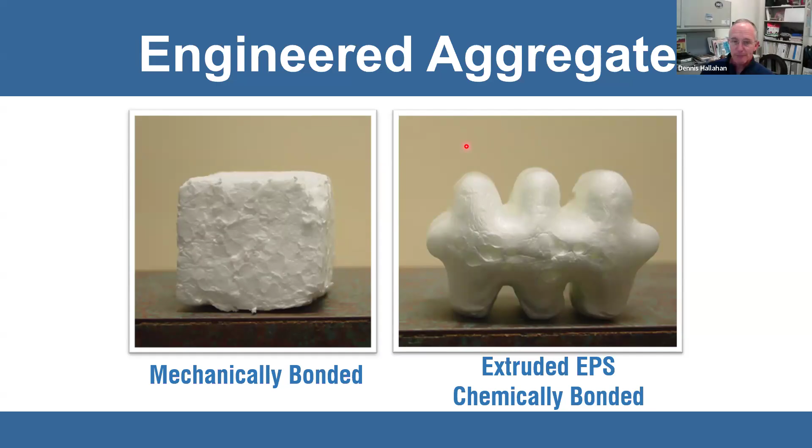A lot of people say, hey, how does that product, that material perform in a wastewater environment? Well, it does very well. It's what we call inert. It's not affected by wastewater characteristics and that sort of thing. So there's an assessment on that.

And EasyFlow is IAPMO certified. What does that mean? Many states, you can imagine a company, a manufacturer such as Infiltrator, we have to get approvals in every state for every product. And many states rely on the UPC, Uniform Plumbing Code. So how do you get in the Uniform Plumbing Code? You get IAPMO certified and tested, then you can be accepted into UPC. So it's just another item for you to say, okay, this product is well known, accepted, and used.

And what you're looking at in this trench is what we call EZflow 1203H-Geo. This is what you're going to see in most installations for EasyFlow in Illinois. What does this mean, 1203H? Well, it's a 12-inch bundle, so it's a 12-inch diameter. It's three of them. H is horizontal, so 1, 2, 3.

The center bundle has the pipe for the wastewater to enter from the septic tank or distribution box. It then falls to the trench bottom and disperses throughout the whole trench, and that water level rises over time. Everything has a design life. Most septic systems average a 20-year design life. So over the course of 20 years, this system will be full with water.

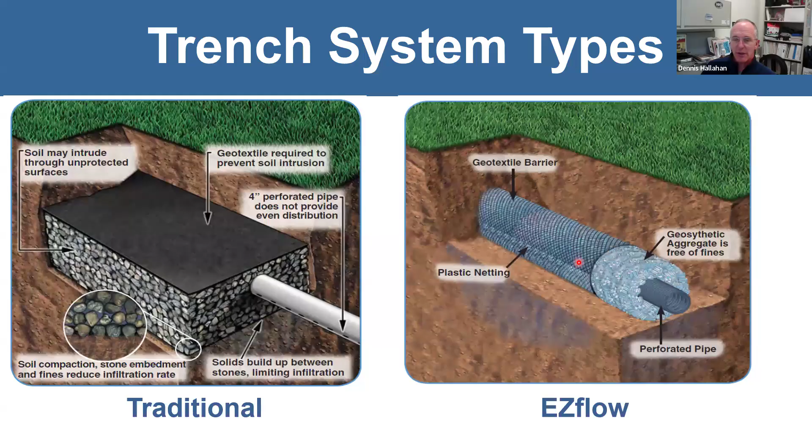Again, so this is what you may have seen or may have been typical if you're older in the business or been around a while, but it's really becoming less and less common. The chambers and/or EasyFlow are now becoming what we call conventional technology. You're going to see those more and more being installed out in the drain fields, and I'll show you some reasons why.

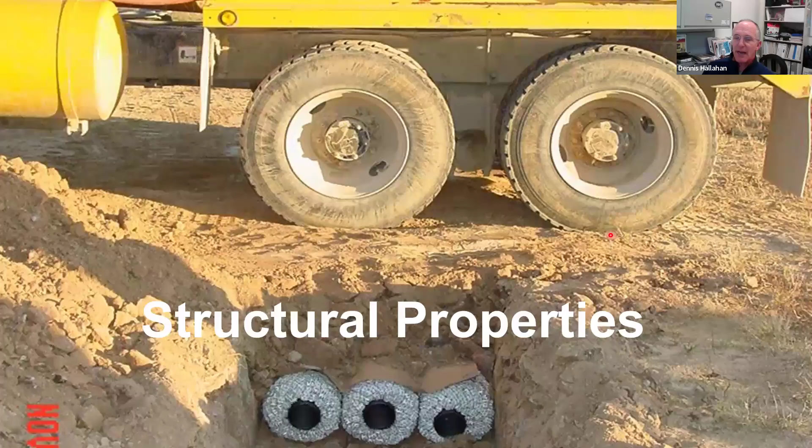Structurally, how does it perform? Very, very well. Once the product is installed in the trench or bed format and backfilled, you see a cover of 12 inches to meet what we call H10 loading. H10 loading is 16,000 pounds per axle. A car would be about 3,000 to 4,000 pounds total, spread among two axles. So you can see this has a large factor of safety.

I like to tell everyone, the worst day structurally your septic system is going to see is installation. The standard now is an H10 load rating with 12 inches of cover for the product. That's become a national standard that Infiltrator has implemented and many states have adopted. Think of a rubber tire backhoe, two axles, with a bucket on the front and excavator on the back, driving around. That represents a significant point load. So when they install it, backfill it, and grade it for that day, that's the worst it's going to see in most cases. That's what these systems are designed to withstand. During installation with 12 inches of cover, you can drive whatever you want over it, cover it up, get the grass to grow, and you're good to go.

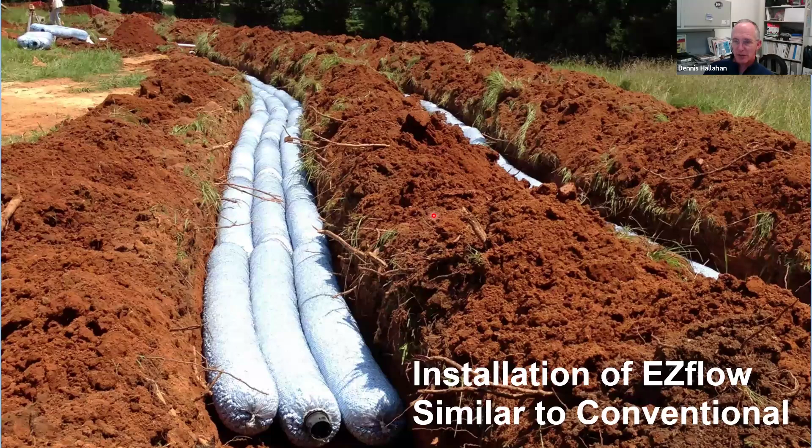Easy flow installation is very similar to conventional systems. Stake out your system, where it's going, excavate the trench down to the design trench bottom elevation.

Ideally, we like to keep them shallow. Shallower is better, but if there's better soils down deep, meaning more permeable soils, that's fine. But you'll find in most cases in Illinois higher groundwater tables, so typically they're installed pretty shallow.

You're going to excavate the trench and check the trench bottom to make sure it's level. The contractor will shoot the elevations, and it may step down the hill as you see here, but hand rake the bottom and then install the product. So very, very easy to inspect for systems.

For example, these bundles are 10-foot sections. So if you had 3 trenches that are 100 feet long, you just count up the number of bundles, and if you have 10 bundles, it's 100 feet. Easy to check the trench bottom too. You can just hit the tops of the easy flow with the level, the rod, and check that.

So very, very easy to install, no different than conventional systems. As I like to say, all these systems, whether it be stone and pipe, whether it be other products like easy flow or chambers, they're all soils-based systems. So the soils are what's important. We must protect the soils as much as possible.

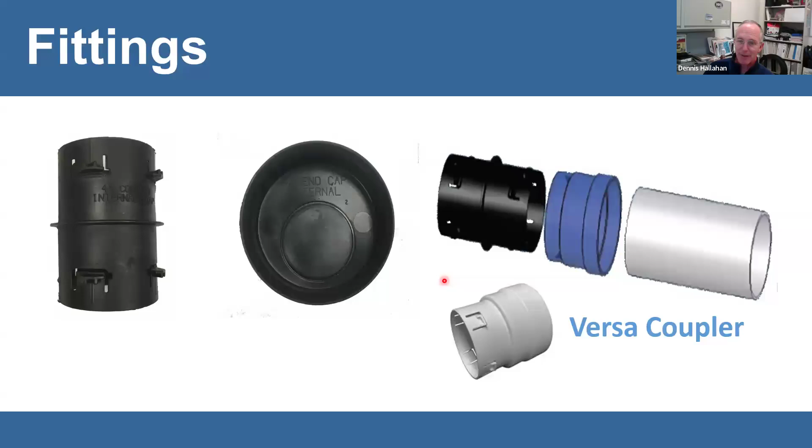Fittings. This is just a simple coupler that couples the two bundles together, that center bundle that has the pipe. They snap together easily. This is the end cap for the end of the line. And this is where you connect to the wastewater coming into the trench. So let's say this is the pipe coming from the septic tank or coming from the D box. There's a coupler there that goes from the PVC pipe to our coupler over here that then connects into the 4-inch pipe in the bundle. So very, very simple snapping these things together out in the field.

As Dr. Siegrist said from the Colorado School of Mines, who was one of the wastewater gurus in the past, he would say to me, Dennis, we're taking wastewater, which is water itself, which plants and roots love. But not only that, it has nitrogen and phosphorus, and we're placing it in the root zone. If you don't think roots are going to come in here, whether it's grass or trees or anything else, you're kidding yourself.

Where roots can be a major problem is in sanitary sewers, right? Where it actually plugs the pipe and the pipe is physically going to back up. So roots would be a problem in our systems from the house to the septic tank, right? That's what we call a sanitary sewer. It's just carrying solids and liquids getting into the septic tank. So if roots got into that piping, that would be an issue.

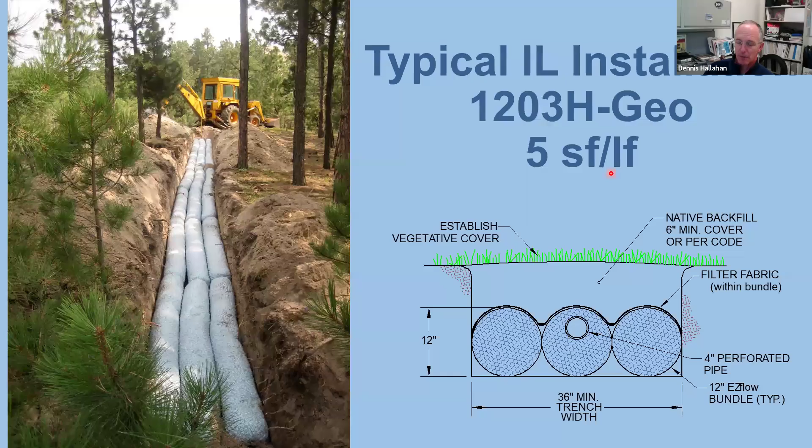Again, dry soils, you can see here.

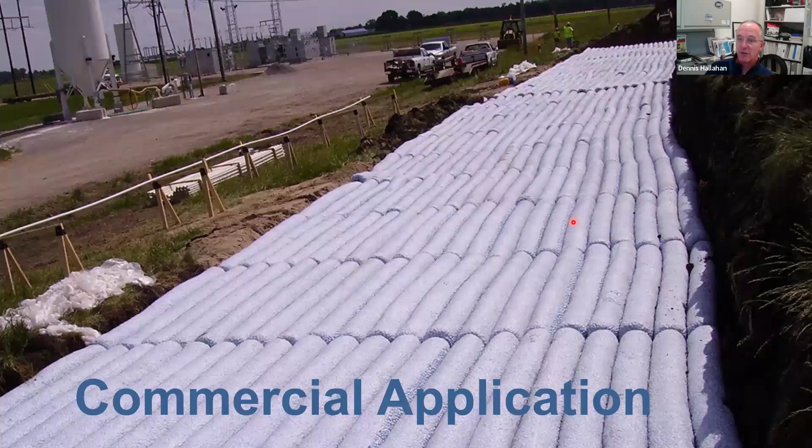We can also have commercial systems. They just get installed bigger, right? So this is a system for a mine in Illinois that went in. Very, very big system. You'll see beds here - that's one of the many beds going in on the side of this slope.

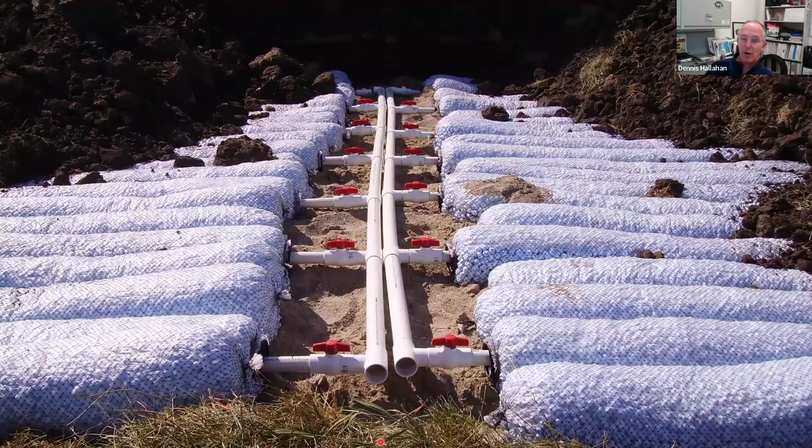And you can see we have different zones. A pressure pipe will hook up here and here, so this is a separate zone from this one. You can turn some zones on and some zones off if there's issues going on. It allows for management of the wastewater. So we can design them for single family or for commercial systems.

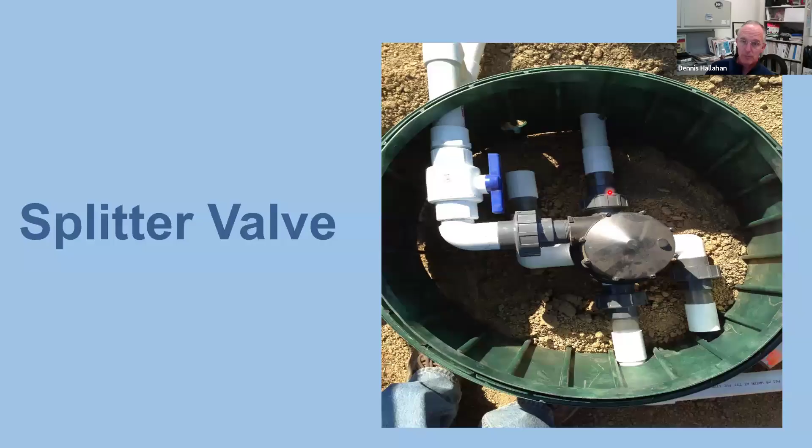This is a splitter valve. When we said go into different zones - let's say the pump comes on, it's going to go to zone 1. Next time the pump shuts off and comes on, it goes to zone 2, then zone 3 and zone 4. So how is that done?

It can be done a number of ways. One is solenoid valves - electrically actuated valves. Or you can have a splitter valve, a zone valve. These are called different things, but you can see the wastewater coming in from the pump and it goes to, let's say, zone 1, zone 2, zone 3, and zone 4.

So they have up to 6-way splitter valves. These are hydraulically actuated, no electricity required. Some engineers like this, some like to have electronically operated solenoid valves. So you may see some of each of these in the field.

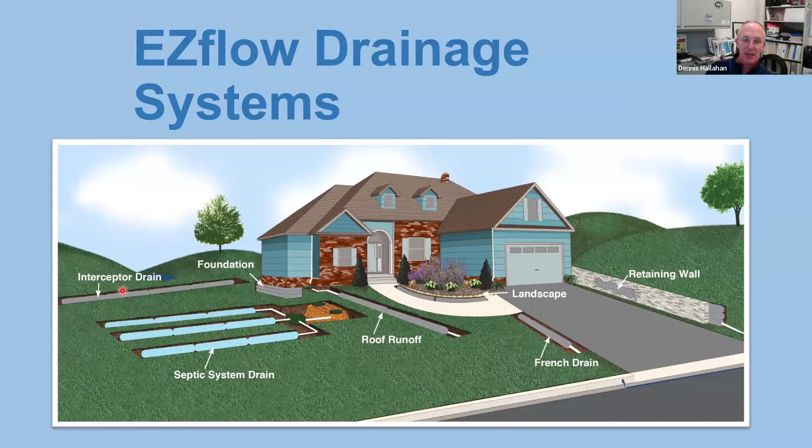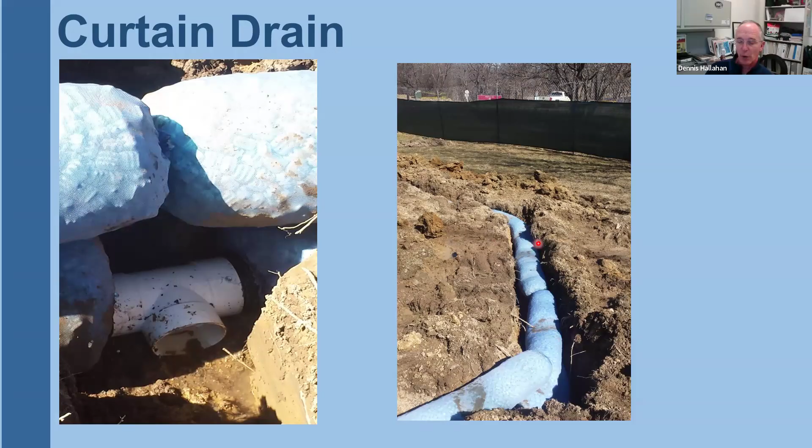In Illinois, we have approval to use EZflow for curtain drains, which are very common with on-site wastewater systems. If you have high groundwater, you can install the perimeter drain or curtain drains. Here you see one that's actually functioning, here's it being installed, and here it is during a heavy downpour - you can see water just pouring out of it. So it's very, very effective with EZflow to absorb that groundwater and move it out of the site.

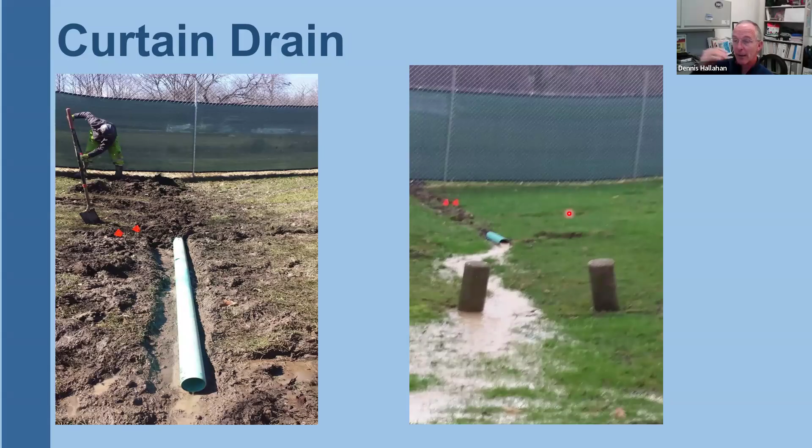Because ideally, we want our systems to be what? We want our systems to be high and dry to perform effectively.

Okay, now I'm going to move into what we call CTD. Some of you may be familiar with this. So CTD, what's that? That's combined treatment and dispersal. Right, so we're going to have a look at that.

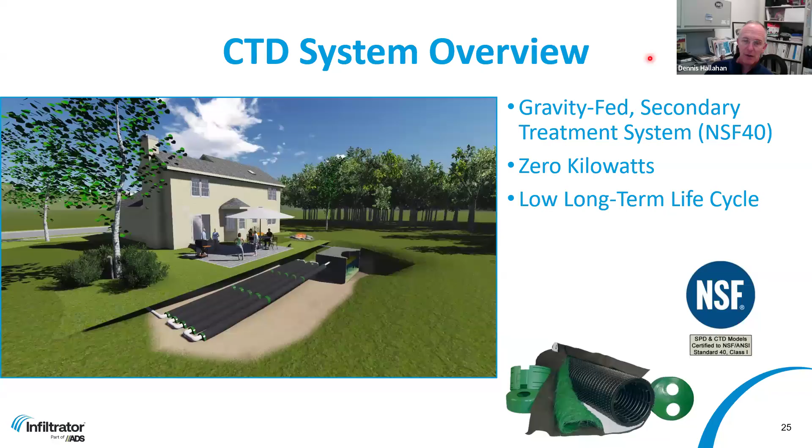Again, so it's combined treatment and dispersal. This is where, think of it as a modified proprietary sand filter. We can put it anywhere in the country now because it has a product, it has sand, and it goes on top of native soil. So let's go through the different layers here. The contractor will come and prep the native soil, install the system sand, a depth of 6 inches, put the product on top of it, and there's many products for this, what we call CTD systems. Backfill with sand around the system and put some cover over the top with soil, then have a vegetative cover. So those are the layers we have in a CTD system.

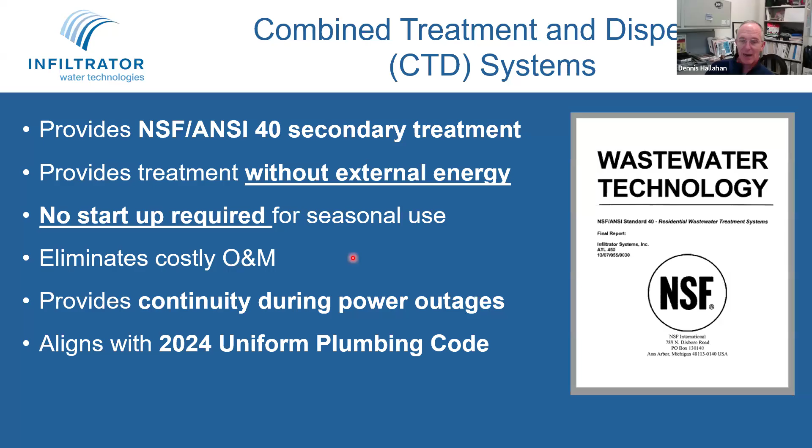Testing on this - this is actually approved as a treatment system. The CTD system is what we call NSF 40 certified. So this takes the place of a mechanical treatment system. If you're just looking for BOD and TSS treatment to NSF 40, this passive system will take care of that. It provides treatment without any external energy. It's all passive, no startup required for seasonal use. It eliminates costly O&M, provides continuity during power outages, and aligns with the UPC, the Uniform Plumbing Code.

If I were to ask everyone in the room, or a bunch of engineers, what do we need for wastewater treatment? What two factors do we need? We need oxygen and we need surface area, right - those two factors. So the soil provides that for us. I travel the country and tell people, look, the answer for wastewater treatment is right under our feet. Soil is a very, very effective treatment mechanism.

All we're doing is taking the effluent - think of it as organics. Organics is food, we're just feeding the bugs, the bugs being the microbes. Microbes are just sitting there waiting to be fed. We apply that wastewater to the soil, and the microbes just love it, they eat it and consume it. So it does a great job for us.

Now, the one thing NSF 40 does not address or treat by design is nitrogen. If you're looking for nitrogen treatment, then we may go back to a mechanical treatment system with recirculation and other types of things. The NSF 40 does not address nitrogen, so we're just looking at BOD and TSS for a higher level of treatment.

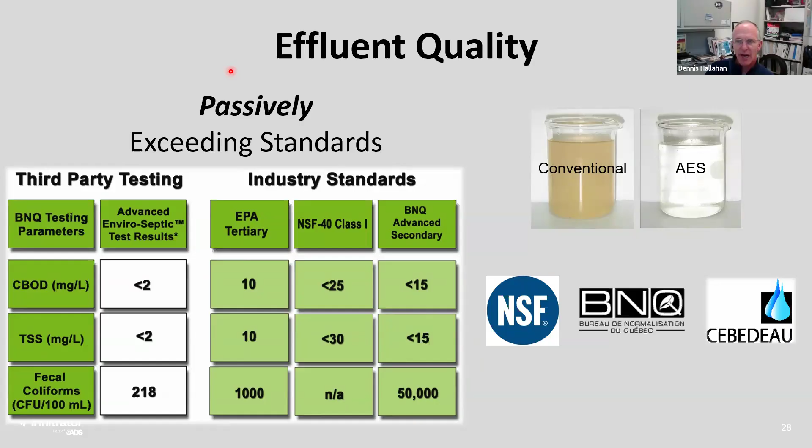So whether it be EZflow, whether it be a CTD system - again, many products there, other manufacturers, our stone and pipe system - all these systems are soil based. We still need to have a very, very thorough site evaluation. We need to know where that water table is, what the application rates of the soil are. So we need to get the soil scientist out there and do a very thorough site evaluation.

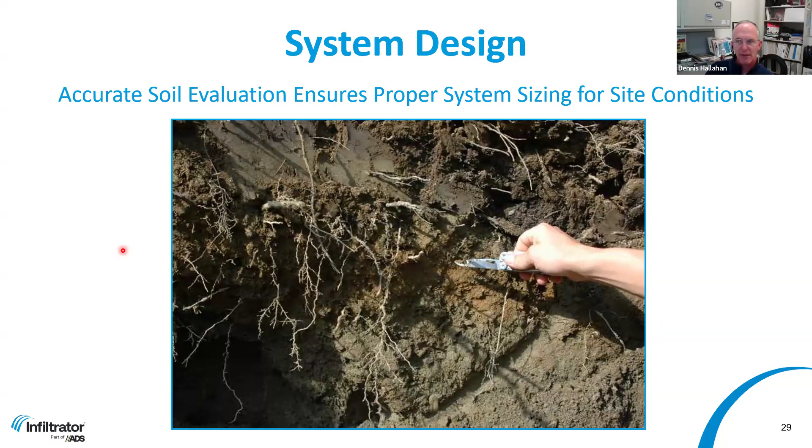The design guidelines for AES are very simple. We size it based on 70 linear feet of pipe per bedroom. And then there's spacing, and most states have a trench length maximum, most of them at 100 feet, so we put that as a limit, but other states allow longer lengths if you'd like. Just like we say the recommended minimum length is 30, but there are some cases where we need to be less than 30 because it's a repair.

And hey, Dennis, I got a backyard - it's a tight little backyard, I don't have 30 feet of width or length, I need to have a bunch of rows that are 20 feet long. Okay, fine, we're happy to do that. But ideally, somewhere between 30 and 100 is good. And then, of course, all the rows are installed level, but there's a tolerance as well - it doesn't need to be exactly level.

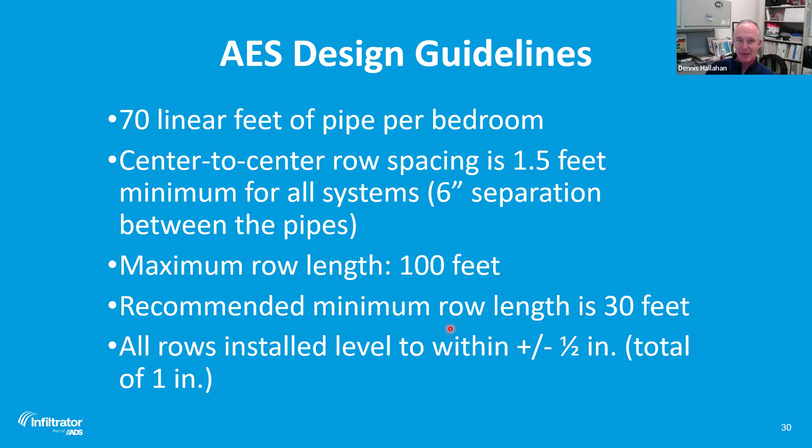Lots of system flexibility here as well. Just like EZflow, we can have curved systems to fit the site, to get around trees or get around a utility box or whatever's there out in the field.

The first interface is wastewater, so septic tank effluent, into the soil. That sizing is 70 feet per bedroom for residential strength. If we're talking commercial, get in touch with us because it's a higher strength effluent, so we may need more trenches, a lower loading rate, or advanced treatment in front of this. For today's application, let's just talk residential strength.

So this first interface again is household sanitary waste going through the pipe, coming out into the soil. Again, that's 70 feet per bedroom.

Then the wastewater travels down through the soil and gets treated. It hits this secondary boundary, which is between the system sand and the native soil interface. If I have a native soil that's very porous, like a granular soil, I don't need much interface here to make that go away. If it's clay, I have to expand my boundary because it's basically now clean water hitting the native soil. So a clay interface may have an application rate of 0.1 or 0.2 gallons per day per square foot, whereas the granular interface application rate may be 1 gallon per day per square foot.

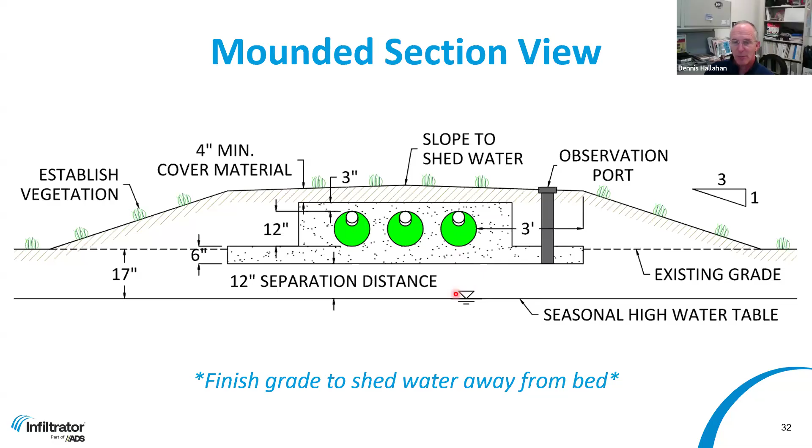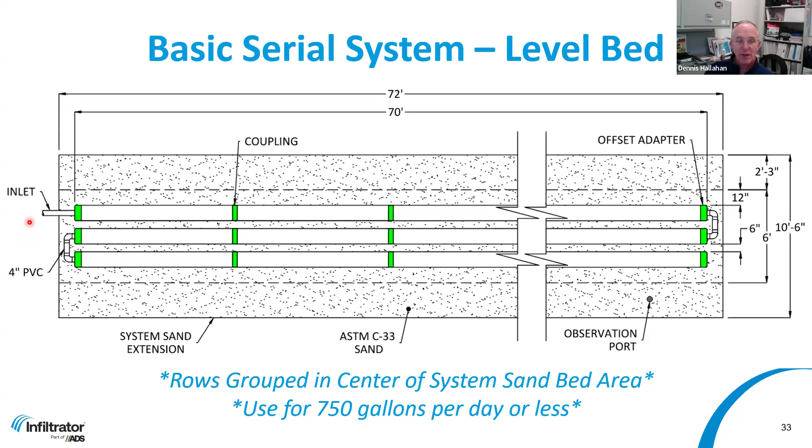Lots of ways to lay out a CTD system. This is a serial system, so it comes in maybe from the D-box or directly from the septic tank, travels down row one, comes back for row two, and comes back again for row three. This could also all be set up as parallel—come here with a T, or come here with a D-box and go to each row. It's very, very flexible with design.

Just to show the piping layout, you can see we're connecting into the ends, whether this be one big long pipe with a header pipe. This system happens to be serial distribution, which comes into this first pipe, again from the septic tank or distribution box. It would travel down the length, come here, go down, and come back, and so forth. So serial distribution works just fine—we have no problems with it, and we have a lot of history with it.

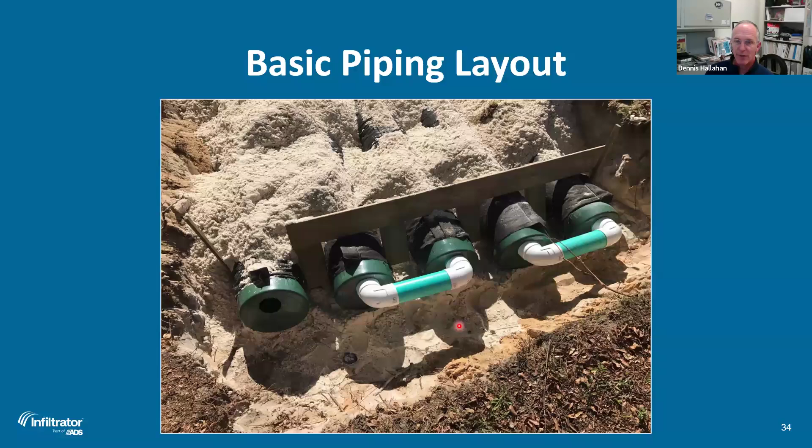Sloping with CTD has many benefits. If we were to lay out a chamber trench system, a pipe and stone system, or a bed system, we'd have to fill and then come down on a 3-to-1 slope—a lot of fill having to be brought in, a lot of site disturbance. With the CTD system, we just lay it out at grade. We step these down, just like stepping trenches down a hillside, so it can be very effective with a small footprint and fit the site very well.

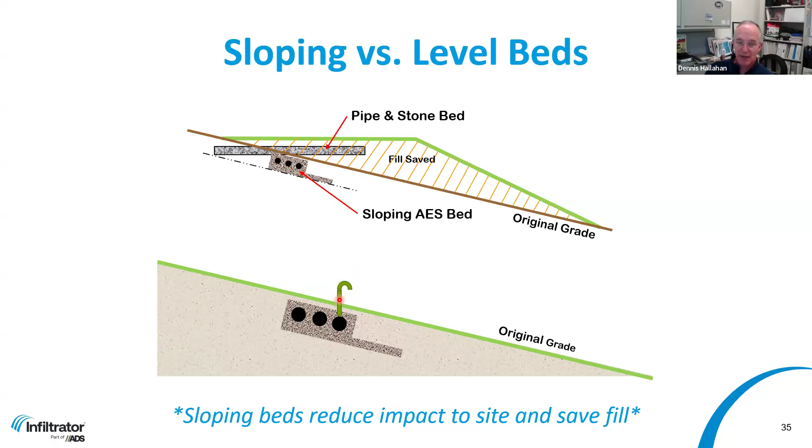Notice we show a vent here. AES systems, at least for our products, Infiltrator products in Illinois, do not require a vent. Yes, the designer or contractor can install one if he'd like to, but it's not required.

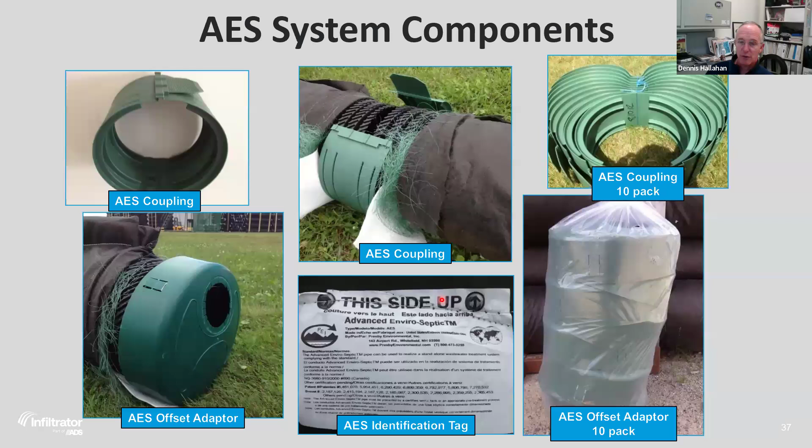There are components to the AES system, just like the EZflow system. We have couplers. The pipes come in 10-foot lengths, and they're coupled together. We actually have a new coupler that's a little bit simpler and easier and faster to use now, but this is our older one, and you'll still see these out in the field until those all get used up.

So very simple to attach the system together. Again, more layouts - what if we had multiple beds? Here we have a D-box coming in, going to bed 1, going to bed number 2 and 3, and so forth.

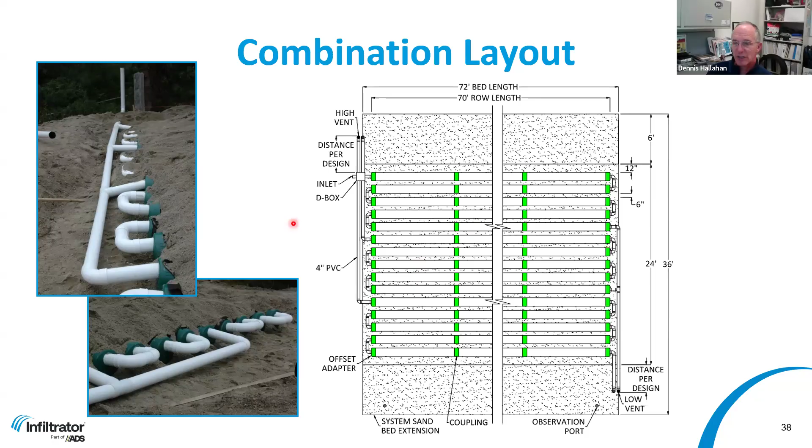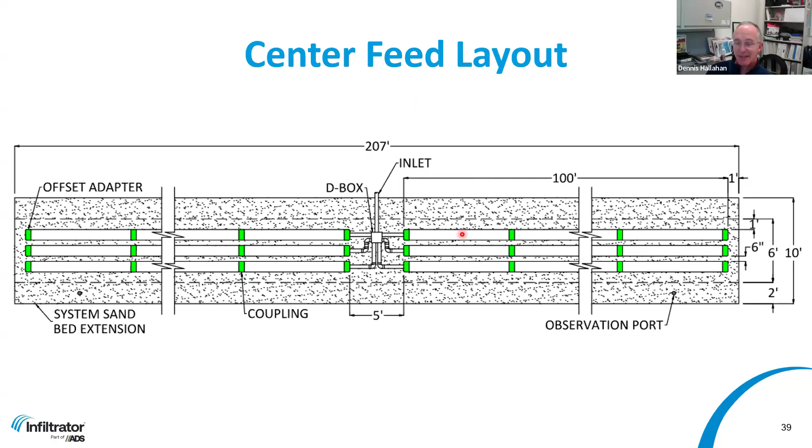You can imagine a large commercial system may need to look something like that. Here's a center feed - this is maybe a long, skinny lot. We can't be over 100 feet with any one trench, so let's come in the center, go 100 feet one direction, 100 feet in the other direction, and that happens to fit the site. So however you plumbed a system or designed a system for the layout, the AES system can accommodate that as well.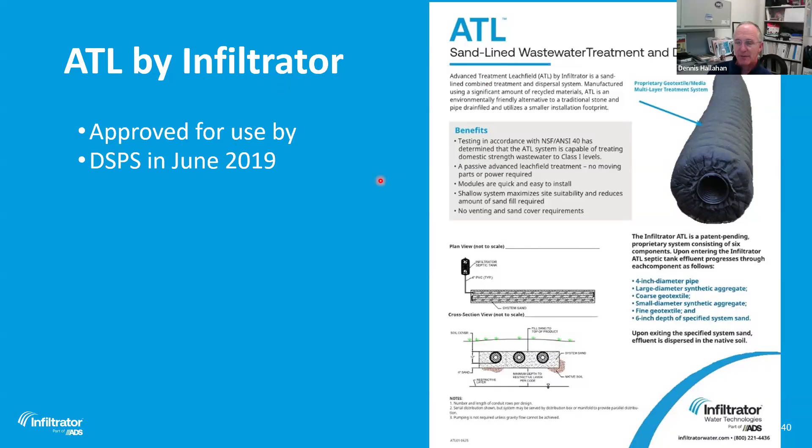Another CTD system you may see in Wisconsin is ATL, that's Advanced Treatment Leach Field. I just want to mention it in case you do see it, but that's also out there. AES, meaning Advanced Enviroseptic System, is definitely more common, but I just want to mention you may also see ATL. Very, very similar, very common type of system. It follows all the same design guidelines.

So installation, again, very simple. You're going to prep the site, assemble the system, install it, backfill, and then provide your site grading. So step number 1, what do you do? The contractor shows up, scrapes all the organics from the dispersal area off to the side. This is really important.

Where do we see most failures with this system? It's that native soil interface - maybe it's compacted, maybe it's smeared. So however you prepare, let's say, a mound system, you till it in place, you have the chisel plow, or however you do it in your area, please do the same. So you're looking to provide an interface that's not smeared, that's not restrictive.

And then mix in that system sand - sprinkle it, ladle it in, or push it in from the sides with the dozer pushing it in. Do not have the dump trucks drive over the system and dump on top of it, traveling over the system. Keep those dump trucks off. It's all about the soil.

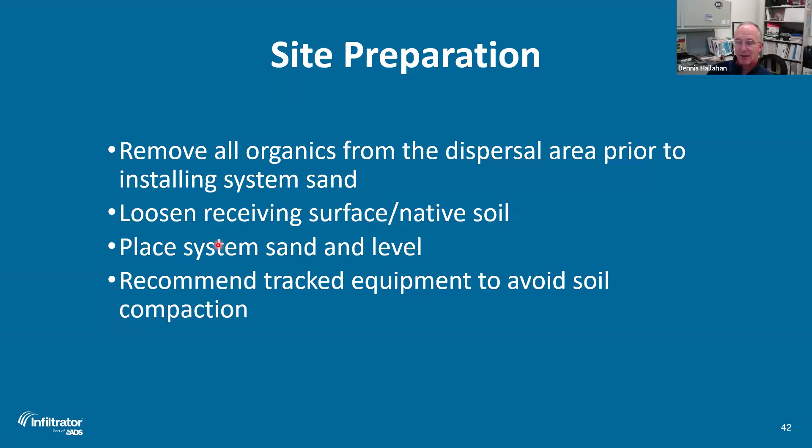So we're going to loosen the receiving soil, that native soil interface, prep it nicely, and then place the system sand and level it. By placing it, we're saying ladle it out there, scoop it and ladle it, or push it in from the side with tracked machinery. Again, we're looking for low impact to that soil interface, always looking to protect that native soil interface.

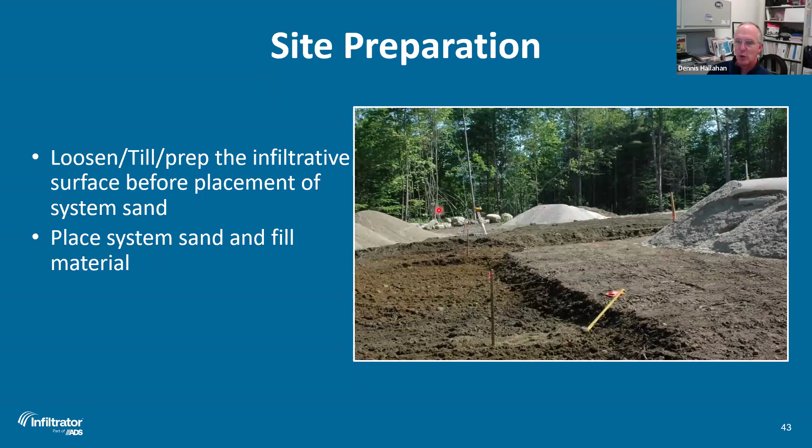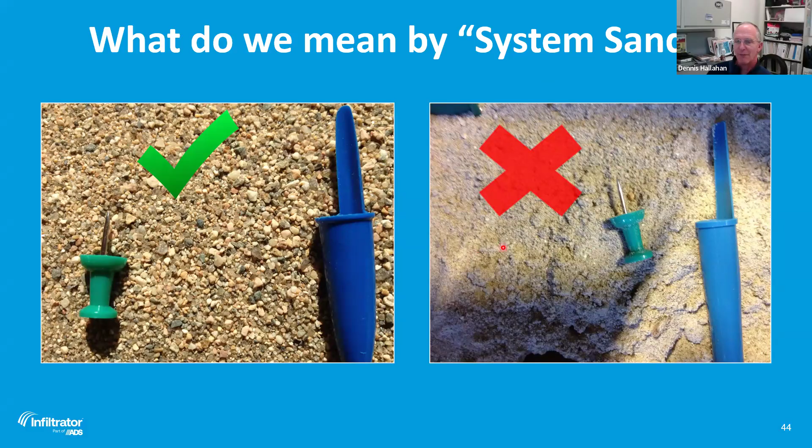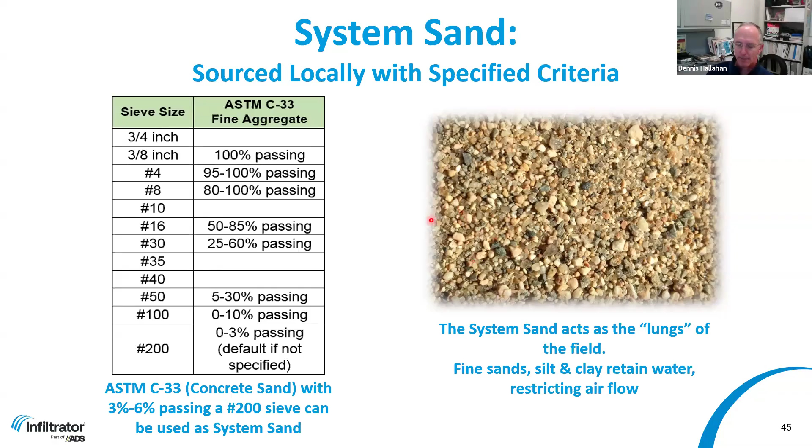There is a spec check available, so you can actually inspect the sand out in the field. We have instructions on that, we can train you on that. What's really, really great is if you do this once or twice out in the field and the contractor knows you're coming to check on it, you can guarantee that contractor is not going to cut corners with the sand. He's not going to use the cheap stuff and try and sneak it by you. If he knows you're coming out with this - I'm not saying you have to use it every time, just do it every once in a while - then you'll keep that contractor in line. So it's a great tool to have in your car with you.

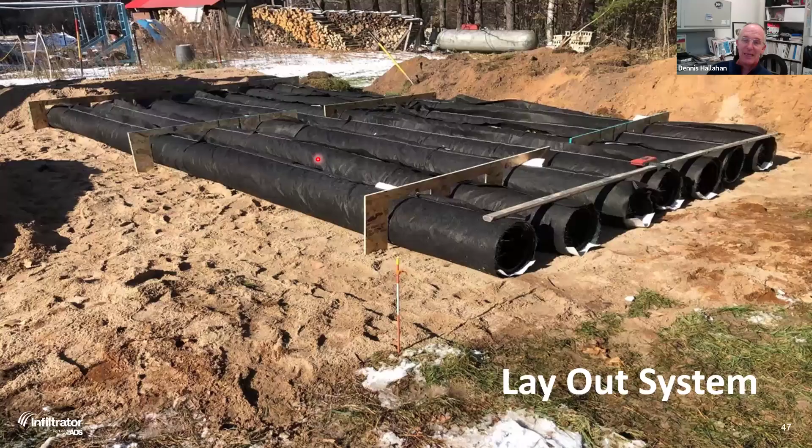Here you see a typical AES system going in. This happens to be a bed system. The end caps will go on. The contractors typically make some rough forms to hold it in place, so when they're ladling that backfill on top, the pipes don't move. There's a number of ways to do that, but those will get pulled out.

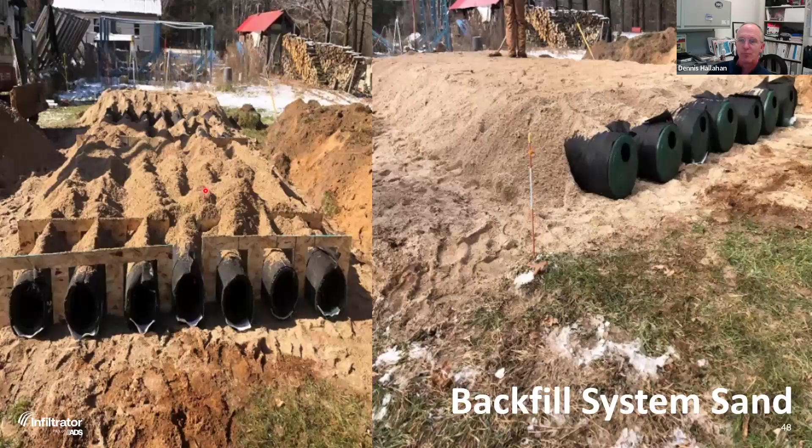What do we need for maintenance? Keep in mind, this is an NSF 40 treatment system, so there are other treatment systems. Hey, I have a blower - what do I do? How much sludge is in the tank? All those types of things.

Well, there's really not much maintenance to do with this CTD system. It's really whatever you needed to do for a conventional system, because there's a septic tank involved. So the septic tank and drain field - the drain field just happens to be, I'll call it, an optimized sand filter. So what do we need to do?

Just check to make sure all the components are buried, no rodents have come in and dug holes, and there's no moisture on top of the field with soggy soils. Maybe the system was abused or something and grease got out and it's starting to pond.

So you just gotta walk the drain field and check it. Pump the septic tank on an as-needed basis, and if there is a filter, pull the filter and clean it to maintain the filter. But that's really it - the same things you would do for a conventional system, you would do for the CTD system.

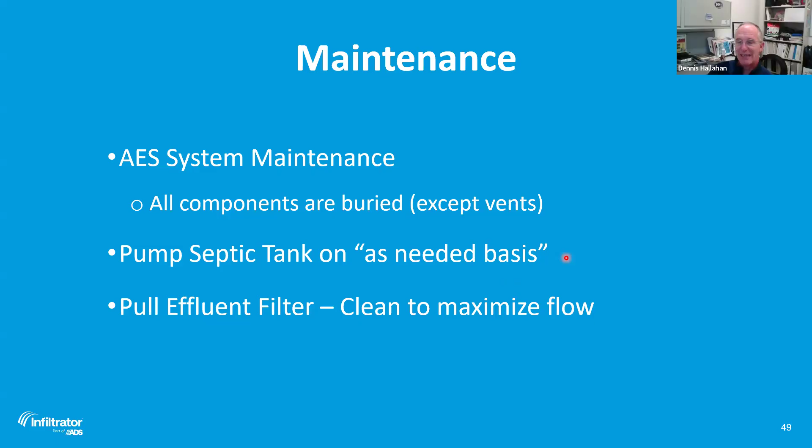So what does Infiltrator have for you to look at, to get training on? Certainly, you can always just call us and we'll take you through this. So don't feel like you have to memorize this, but go to our resource center. We have online certification training.

We have some Illinois-specific design manuals for both AES, CTD, and EZflow. So we have those design manuals available for you. Some states require we provide certification training, and then the contractor has to take the test. I'm not sure what Illinois requires - Curtis may know, and he'll let us know. But we have that available for you.

Yeah, Dennis, we do require AES online certification. That way the guys get put onto a list, so if a county and or the state calls to request a list of certified installers for this product, we have it available. So even though I might go out on a job site and train someone, I still make them take the test online just so that we can get the certification in house. Hey, that's great, Curtis. Thanks for jumping in.

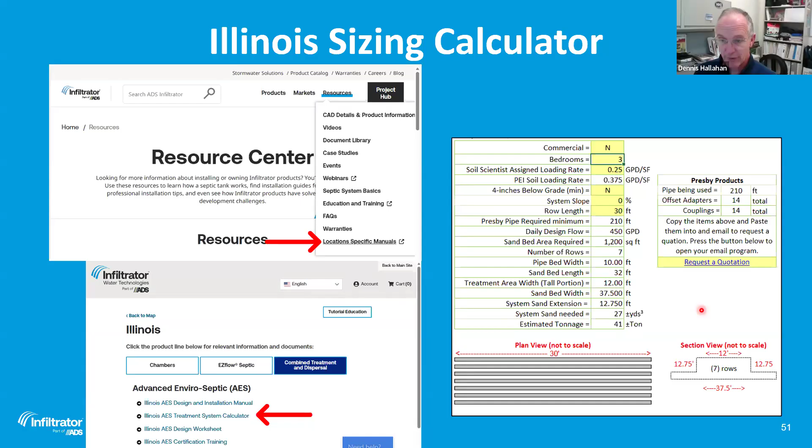Okay, the whole point of the presentation was what to use when - so EZflow versus CTD. When would I use one over the other? Well, they're pretty basic and simple if we break it down. EZflow is more a conventional system for conventional sites. If you have the space and the area, it's not a super tight site and you can fit it, it's probably your lower cost solution because you're not importing sand and that type of thing. So then you do use EZflow.

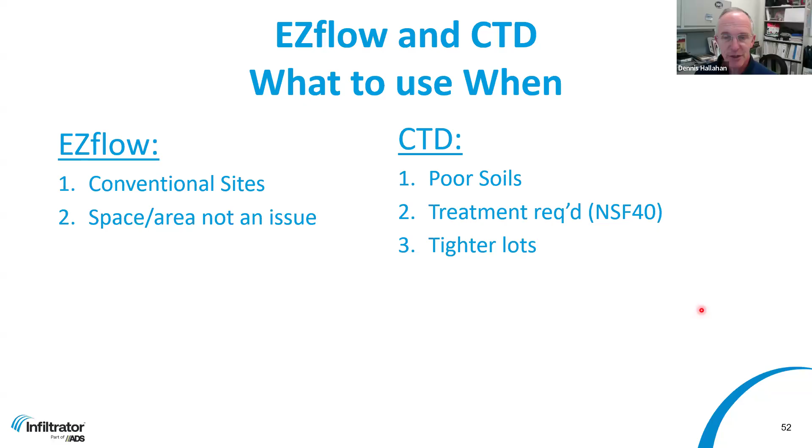When would I use CTD? Well, in poor soils areas, if treatment is required - again, to NSF 40 standards, not with nitrogen reduction - and tighter lots. So those are really the breakdown of when somebody would use it. Now, there are two other things added in here: there's both a designer preference and a contractor preference. Somebody may say, look, I just love CTD, and I'm a designer.

I'm going to specify it, or maybe the contractor loves it and he's all set up with his distributor, and he gets shipped truckloads right to his yard from the distributor. So they can do that. I just want to throw this in because sometimes designers or contractors have a preference for what they want to do.

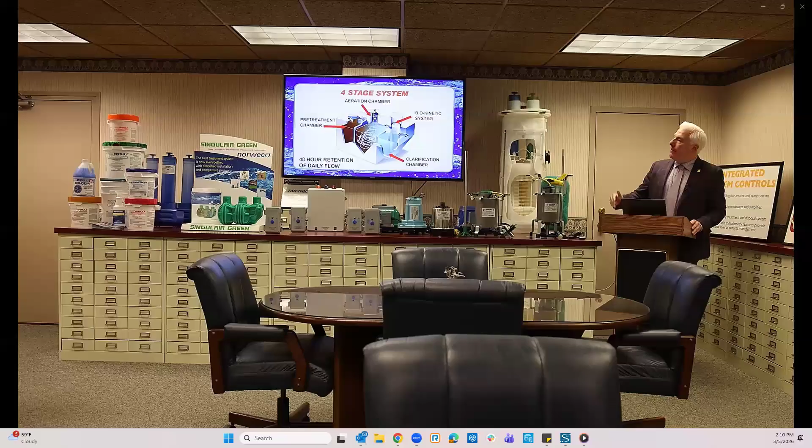So this is the smallest chamber in the Singulair technology. This is going to have a 6-hour retention time of the daily flow. But very importantly, this is going to be where final filtration takes place through the biokinetic system. We're going to talk more about that, but here is our demonstration cutout of the BK system that also functions as a flow equalization device.

I would pause here just to point out that there is 1,300 gallons total capacity, again, in the base model concrete or the Singulair Green, both of which are NSF certified to treat up to 600 gallon per day. But there's also over 250 gallons of freeboard area for when surges occur.

Now, we just got done with the Super Bowl, obviously prior to that, Christmas, New Year, other holidays, and that's where this is going to really help the homeowner because, again, life doesn't just happen routinely every day. There are surges into the system, and our biokinetic system really is unique in the industry in that it's going to hold back those surges that occur to ensure that only fully treated effluent is going to go out into the environment or to the disposal area, as opposed to partially treated or untreated effluent.

The final thing I want to say, I did not mention, the pre-treatment chamber has 18-hour retention of the daily flow. So you can see in 48 total hours, the Singulair process will take that raw domestic strength wastewater and treat it to extremely high levels. And don't take my word for it, although I hope you will.

If you look at our field data and our third-party certification tests, which I can provide to any of you upon request, you will see that the Singulair technology—you can count on it. Most importantly, the citizens of Illinois can count on it to treat all of their wastewater to a very high level.

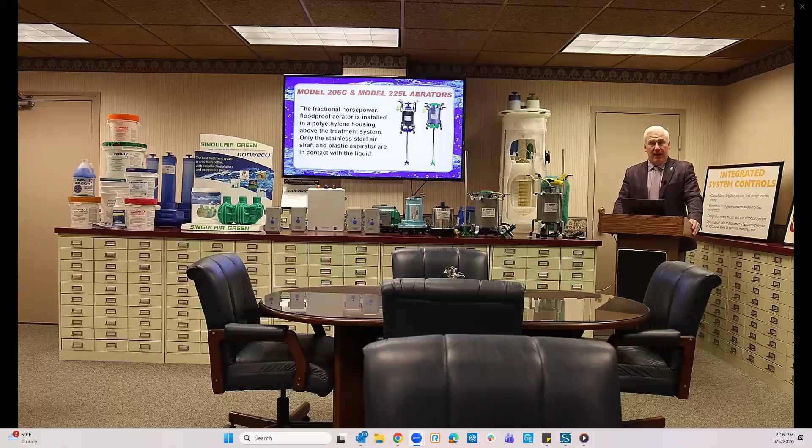These aerators are indistinguishable in terms of the motor bell and the spinning at 1,725 RPM, delivering 3 cubic feet of air, and also where they fall in aeration. The only difference is the bracket pattern, and a slight reduction of the length of the aspirator shaft for our 225L reduces the overall profile of a tank by 6 inches, which, in shallow lots or lots with other challenges, can make a huge difference in terms of inconvenience to the homeowner, but also the work that needs to be performed by one of the professional installers who work with our partners.

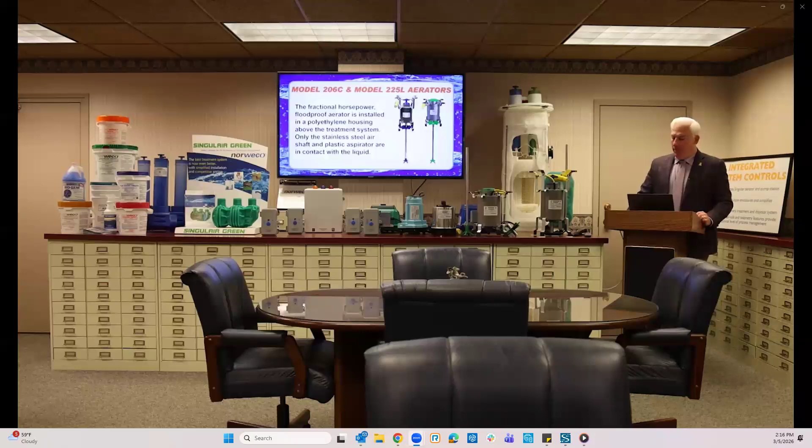The biostatic sludge return, I've mentioned this before, it's a very simple plastic duct, or ducts in the case of the larger capacity Singulair systems, but they do perform a very vital purpose. They're going to direct settled solids that come into clarification to the bottom of that sloped hopper. And they're going to be returned and resuspended in aeration, and by virtue of this, the wastewater will be fully treated.

That's very important for the homeowner, whether they're discharging off-lot through an NPDES permit, or on-lot to their disposal area. Because if you have partially treated or untreated effluent going into the disposal area that's on-lot, you will quickly get that filled up, and it will require remediation, including but not limited to potentially removal and replacement.

The biokinetic system, too, is very simple, and we keep that theory of simplicity because our technology works very well, and we want it to be easy to understand, easy to maintain, and we've accomplished that with Singulair. The bottom line is, as the treated wastewater is entering the clarifier, the biokinetic system works in concert with that biostatic sludge return.

And as the water then leaves the system, you're going to be assured, passing through this NSF certified filter, that most remaining solids are going to be removed from the effluent. And if disinfection is required, this is also an NSF standard 46 and 385 certified disinfection device.

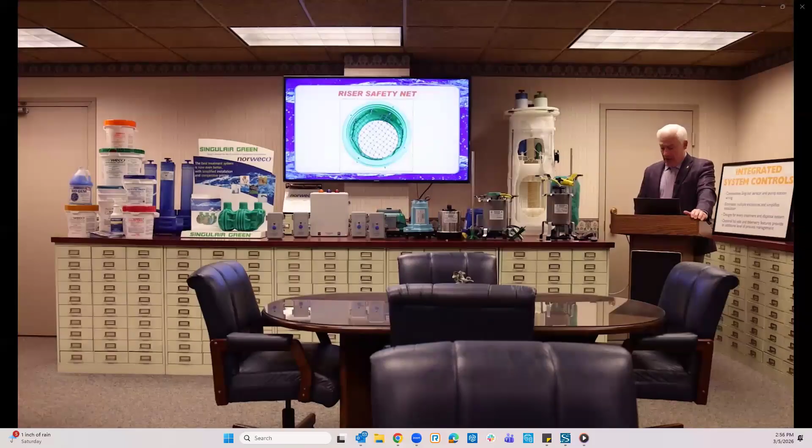From our employees all the way down, of course, to the people who are in the field, the children, animals, and things like that that are going to be near the system. We want to make sure there are no accidents, obviously, with any technology, and what we can control is ours, and we'll work very hard to offer this secondary safety device at cost to our partners, who in turn will offer it at a very, very low cost to the homeowner and other end users.

Very important both with green and concrete. Now with green, we have changed from we used to have 4 screws and grommets for our lids. About 4.5 years ago, we changed to threaded. When we did that, we included a vent cap over the lid that goes over aeration. The other 2 are sealed, so it's very easy to see which one goes over aeration.

And the same with concrete. Whether the partner is still using concrete risers and lids, it'll be obvious which one goes over aeration. Certainly if they're using plastic Tuf-Tite Polylok, which again is becoming more and more the rule rather than the exception, it's very obvious as well.

But it is imperative, and I cannot tell you how many times I've seen this get mixed up. I know people are busy. It's imperative that the vented access cover be placed over the aerator. And again, I won't get into that beyond the obvious, that it's very important.

And I always tell our service folks that come here for training at the request of our partners for service, to take one last look as you're walking away from a system. Make sure that vented access cover is over aeration and the sealed covers are over pre-treatment and the clarifier, respectively.

All right, so a few more things to go over. I want to quickly go over Singulair service.

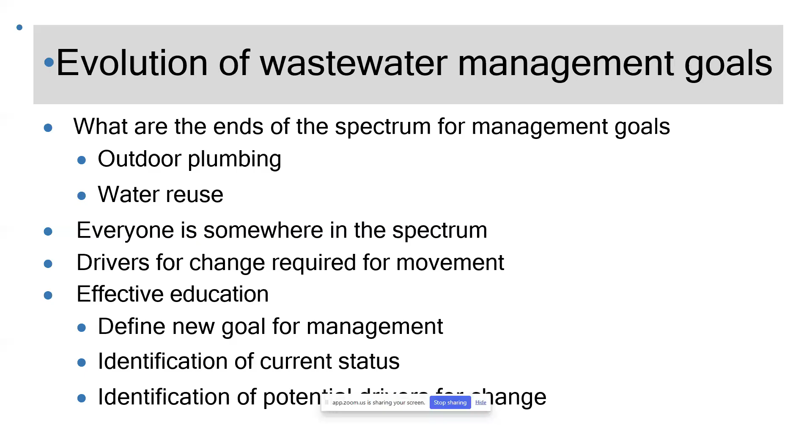As we move forward to have the most effective wastewater systems for communities and individuals, what do we need to know? What education do they need? What management do they need to know? They need to identify the current status and the identification of potential drivers for change.

So looking at outdoor plumbing, the pit privy—the goal is a designated place for waste, that's it. This is kind of your most basic form of wastewater management, and the way things were looked at for the longest time. There's no carrier needed to convey waste.

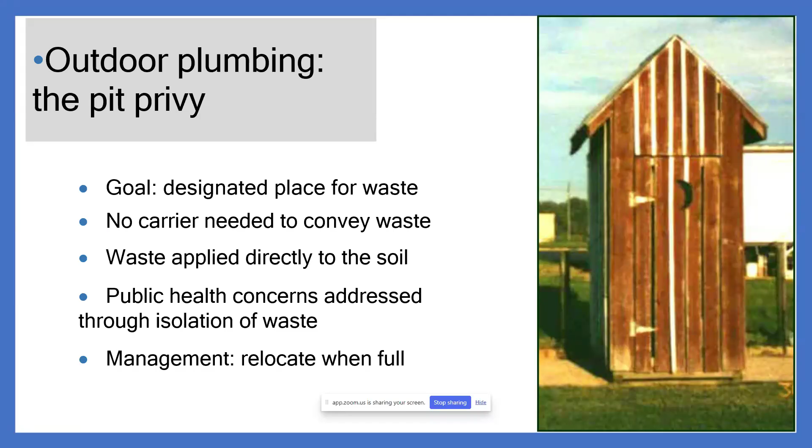You are just collecting the waste and not even treating it—you're applying it directly to the soil. The public health concerns are addressed through isolation of the waste, but we're not doing anything to treat that waste, so the public health concerns are very high. The idea is you relocate it when full. Very rarely do we see this, but we do see it in some communities every now and then—individual campgrounds can sometimes be one.

Indoor plumbing—the goal is to keep everything flushing, to keep everything working. The water carrier conveys the waste out of the facility. You do have a collection system, either on site or a bigger wastewater system. There's a hybrid called a cluster system now as well, which we'll go over later—basically a decentralized wastewater system where you're combining wastewater systems into a community. So instead of one individual having a septic or wastewater removal system on their property, we're combining that, but we're not doing a full wastewater treatment plant. Public health and pathogens—it does remove waste from the facility, and the management is just to keep that pipe flowing and keep everything going.

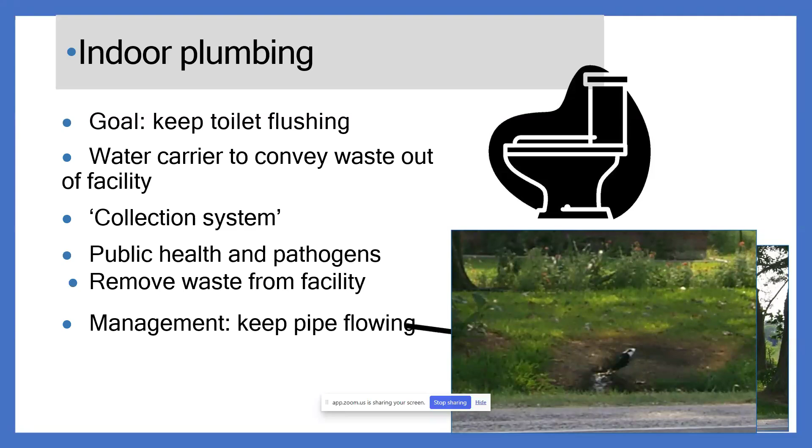Subsurface disposal—the goal is to limit human contact, again burying that waste. We're trying to keep that waste below ground, typically cesspools or deep injection of waste. We don't see a lot of this in the state of Illinois, but they are out there. Public health is disposing of pathogens, treatment is kind of hard, and the management is install, flush, and forget.

Solid capture and subsurface disposal—the goal is to limit human contact, to keep wastewater below ground. Our disposal options again are kind of limited. For public health, it's disposing of the pathogens, and the treatment is to add a septic tank to capture suspended solids. Management is install, flush, and forget. This is going to be the most common one we see among homeowners who are on septic, and it's really the basic form of wastewater systems, just on a bigger scale.

Septic tank and soil treatment area—it's an evolving goal. It's the disposal of effluent, goes away to dispersal, the contaminant treatment. Public health and environmental issues are addressed as long as they're maintained properly and doing all the proper maintenance, which can be overwhelming at times for homeowners. The management is disposal, often none at all, and the dispersal system management is critical for that dispersal. You want to make sure that aerobic soil is there.

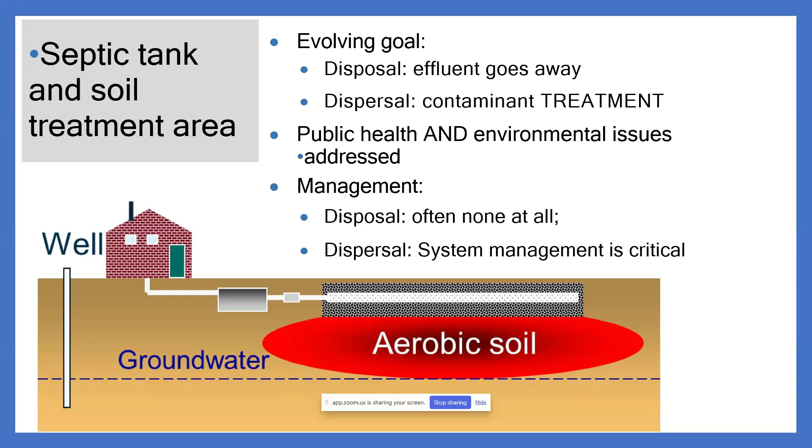This goes back to how bigger wastewater systems compare to smaller communities. While some do have wastewater systems, they are going to be much smaller than your larger community water system, so they take a little more work on occasion to upkeep, both financially and with maintenance.

Our goal for treatment and dispersal is now dispersal. Looking at the hydrologic cycle, we start to address both environmental concerns and public health concerns. Those kind of go hand in hand, but they are in separate categories. Environmental concerns: how can it affect the environment around us, how can it affect what's happening? And public health concerns: how do we make sure we are disposing of waste properly so that people are not sick, it's not affecting their clean drinking water, and nothing is going to happen to them.

Technology advances now allow for the removal of pathogens, solids, and nutrients. This technology is constantly evolving. I think we just saw a presentation on that as well, showing that the evolution of this is going quite quickly, so staying up on it is important.

But at the end of the day, the most important thing we can see is system maintenance. That's the most important thing homeowners and sewer systems can do: making sure that system is being properly maintained, that the wastewater is being properly treated, and disposal and dispersal is happening on a proper level. Once those things start to have an issue, that is when we can get into trouble.

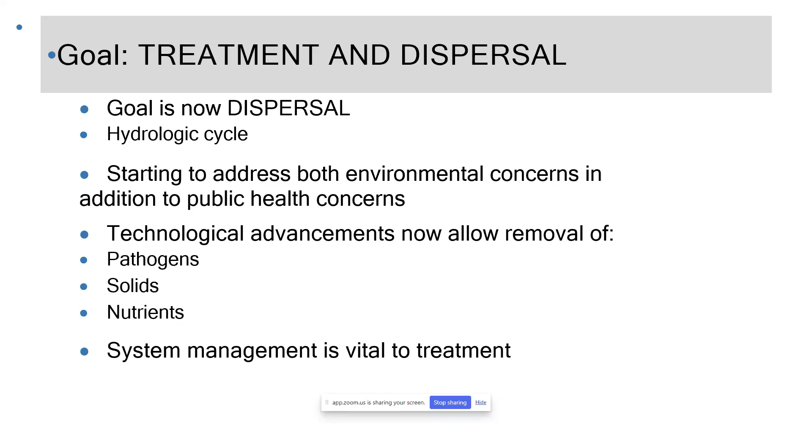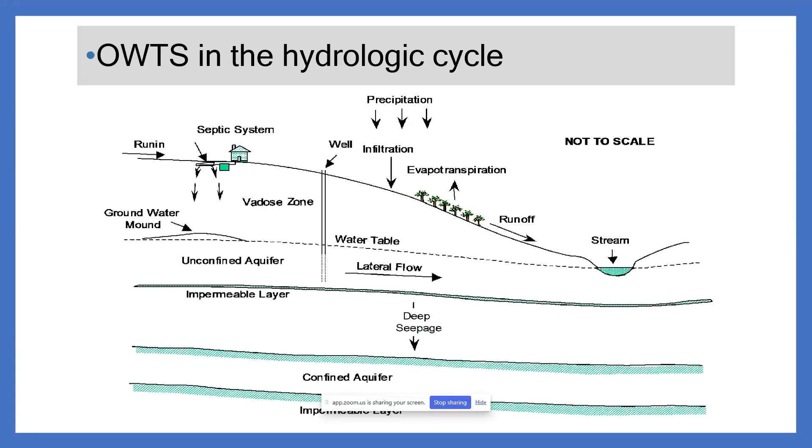So looking at this for on-site wastewater treatment systems in the hydrologic cycle, the real basics here show how it's spelled out, where the flow is, where the runoff is, making sure you're aware of this while looking at wastewater treatment systems, making sure your placement is right and everything is maintained, because at the end of the day they are part of a much bigger system within the water system, and they are key to public health and safety.

Now we're talking about water reuse, a more evolved idea - we're not just disposing of waste anymore, we are figuring out, can we use this water? How can we treat this water so it can become reusable? We can look at outdoor water reuse - can we treat the water to the point where it can be used for landscape, or for crops, or for aquifer injection? We want to make sure process monitoring is done so we have both the most effective and cleanest process, getting the maximum value out of our on-site wastewater treatment systems, and treating as much as possible to get those pathogens out.

We want to look at troubleshooting - it's critical. If there's any sort of failure in this, it can cause much bigger problems, leaking or things not being treated, especially when we're talking about water reuse, if we're actually using this water over and over again, as opposed to just treating it and getting rid of it. Once we go beyond that, troubleshooting and maintenance becomes the most important thing, and management is critical for protection of public health and environment. We want to make sure everything is working properly, so it's critical for everyone to be safe, especially when we're using water reuse.

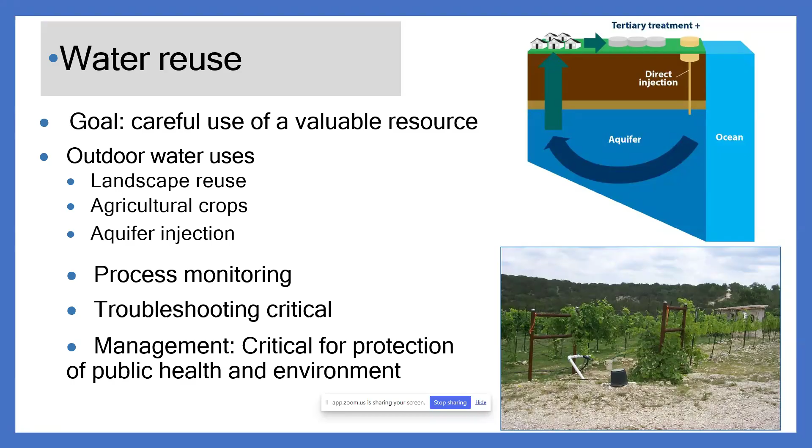Again, looking at water reuse, the goal is careful use of a valuable resource. We're getting to the point where we can no longer just dispose of this wastewater. We need to be able to reuse it, to make sure it can go back into the water system clean and properly, and that this water is being used to its maximum effect.

There are non-potable uses for it. Indoor water reuse, like urinal flushing in the bathroom. If it's treated properly enough, we can look at clothes washing as well, to do our laundry and make sure that it's clean and possible. We are reusing that water, but we are not consuming it.

Pathogen protection, detection through testing, is reactive criteria. It's too late. So we want to make sure we're doing everything ahead of time. If we start suspecting pathogens, it might be too late to go back and see what we were doing, especially with water reuse. So we want to get ahead of this.

Validate the treatment process, operational status, to limit risk. Again, we want to make sure that as we're going through this process, if we're working into water reuse, the treatment process is validated, that everything is working properly and perfectly before we really start going through it.

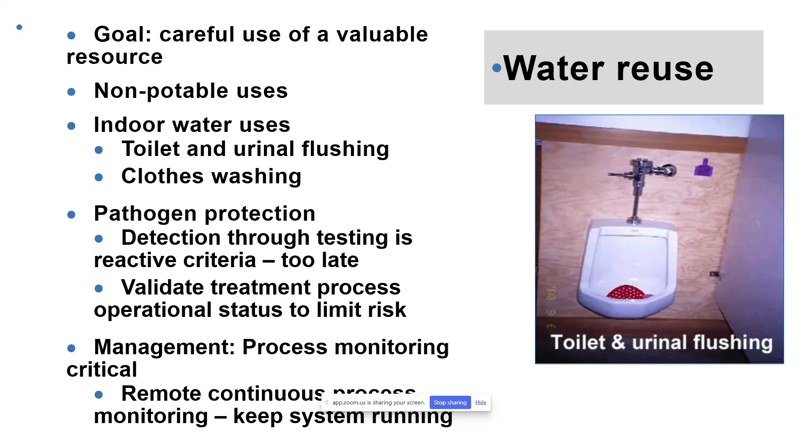So we want to make sure the system's functionality is right. Is it functional? Is it the right type of system for the goal we're trying to do? Do we need to look at septic, or a bigger idea like a private sewer or a much larger sewer system? Or do we need to think about one of those cluster decentralized systems? If you have a rural area that's growing, have we outgrown the basic septic? And if so, what needs to happen so the residents of that area are effectively getting everything they can for their waste disposal?

We want to make sure operations are up to date as well, operating at maximum level and efficient, both in the way the water is disposed of and in cost affordability. We know that building a new septic system within a house, or even a wastewater treatment plant, can be very expensive and daunting. When we discuss this with homeowners, cities, and communities, we want to be aware that operations are very important, and that the effect of those operations, both financially and on the health side, are major decisions for individuals.

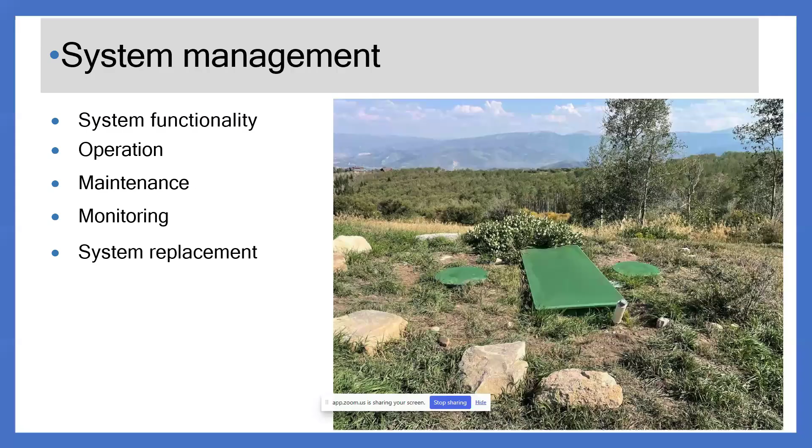Using checklists to evaluate components. Going out with a simple checklist, providing homeowners with a checklist to see exactly what they have within the system, making sure they're not missing any critical parts or that anything has failed within it. So they can quickly do a yearly or bi-yearly inspection to make sure their system's running properly and they don't need to start saving or getting ready for anything.

Recording and evaluating data for troubleshooting component status. Again, making sure they're collecting the right data, that they have the data and understand what it means, so when they do need to look at it, they can see if there's a trend going one way or the other, and make sure they're looking at maximum efficiency.

Process monitoring and adjustment. Helping them understand what the process is within the wastewater system, and how there could be adjustments both seasonally and based on drought, letting them know adjustments need to be made to that process, but most importantly, we need to be monitoring that process so we're effectively doing everything possible. And then analyzing component operational data to predict future malfunction.

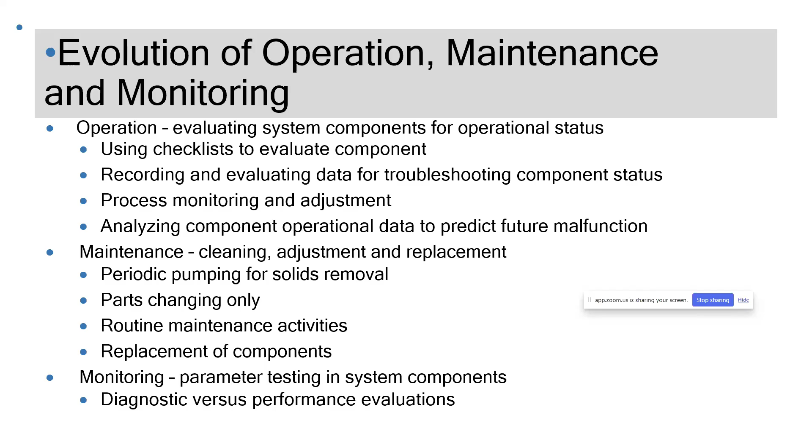So we want to look at reactive versus proactive maintenance. These are vastly different ideas, and looking at proactive maintenance will ultimately save you a lot of work and time. It will also help you avoid critical failure much easier than reactive maintenance, and we really stress this with homeowners so they're aware of the process.

With reactive maintenance service visits, you fix malfunctioning components. You've found a malfunctioning component, but only reactively, now that it's not working or broken, and it might have been failing for some time. It has ultimately hit critical failure at this point, instead of looking at what could have been done before.

Or you replace broken pumps, compressors, or plumbing backup in the house. This is your most obvious sign that there is an issue, and we're reacting to it by seeing what can be done. But ultimately we've already hit critical failure at that point, and massive failures and damage could have already been done.

As opposed to proactive maintenance services, performing routine maintenance on components extends their life, making sure they're running at maximum capability and that we're working with them as efficiently and quickly as possible. We want to repair mechanical components before catastrophic malfunction.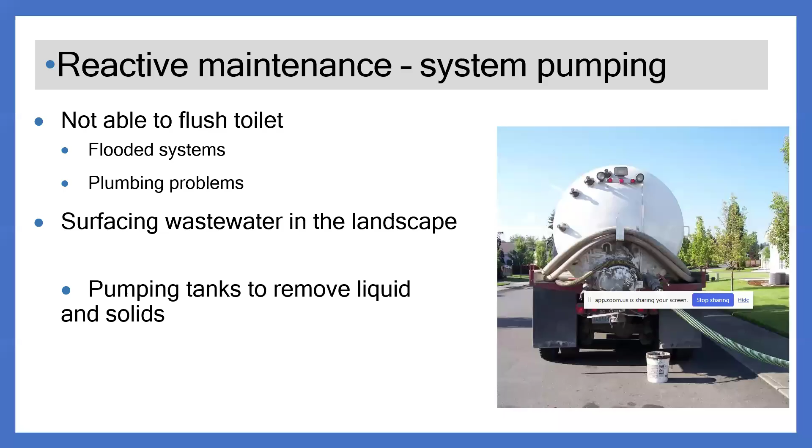Looking at reactive maintenance: system pumping, not able to flush, is obviously one of the biggest issues. You have flooded systems, or major plumbing problems, where essentially you're not able to dispose of your waste. Surfacing wastewater in the landscape could be a potential leak or other issue, and pumping tanks to remove liquid and solids. So those are some of the pumping issues we may run into.

Surfacing wastewater in the landscape - again, we can replace the disposal fields, and while that is useful, we also need to look at what needs to be done to the soil so this isn't an issue in the future. We need to be proactive about that. It's possible to have reactive maintenance at first, but then ultimately start planning for proactive maintenance as we move forward, making sure we're doing everything possible to protect our water and water treatment systems and our assets within both homes and small systems.

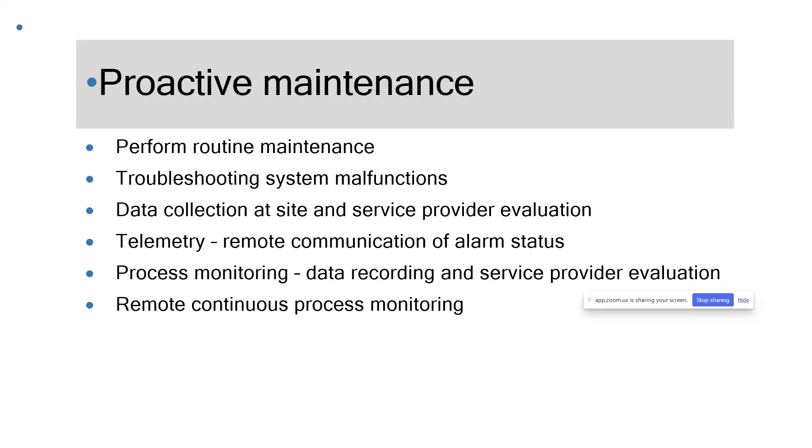And we want to have remote continuous process monitoring as well. As the technology has evolved and things have gotten better, we want to make sure that continued process monitoring is happening, that we have everything in place for them, and that we're doing everything possible to make sure that monitoring is taking place and that we're doing everything within its power to be able to do that.

So proactive maintenance - we want to perform routine maintenance. Does routine maintenance extend the life of the system components? The answer to that is obviously yes. Having that routine maintenance, making sure that we're maintaining it to the manufacturer's guidelines as well, looking at those guidelines, making sure that things are being changed out, tested, greased if needed to be, will obviously extend the life of the asset.

The example here is an engine. Do you need to add or change oil with a combustion engine? Or do you just replace the blown engine? A lot of times we compare our assets to cars, which are an asset, but making sure with a car, obviously routine maintenance is being done - oil changes need to be done, tires need to be changed every couple years to continue the life of that asset, and making sure we're extending it and running it as efficiently as possible so we can avoid an emergency replacement if needed. So yes, performing routine maintenance on components extends the component's life.

Examples of routine maintenance are cleaning pump intake screens - a really simple fix there, making sure to clean off those intake screens on septic systems to make sure everything is getting through and flowing properly. Cleaning and replacing air filters, again a really simple fix and piece of maintenance that will extend the life of your system dramatically and avoid any sort of critical failures if there are any issues. Cleaning drip filters, making sure having a service technician come out, checking all these filters, doing any sort of cleaning if possible, and also learning about how you can potentially do it yourself.

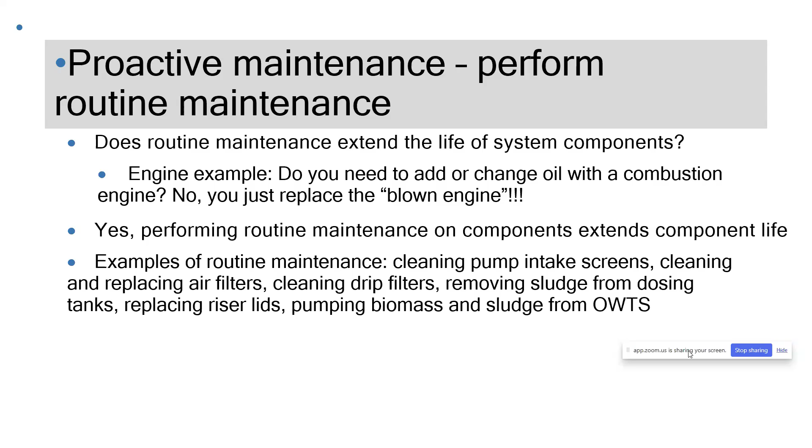Proactive maintenance troubleshooting as a part of business - performing a root cause analysis of the malfunctions. Again, back to what we were saying, it's not only just seeing what the malfunction is, but is there a much larger problem with the malfunction? Do we need to start reevaluating how our system is running and what needs to be done to maximize it? Or is it just a simple failure and we can do everything we can to fix it as well? So fixing the real problem when replacing components.

Much larger time, everything in these systems is built together. So if there's stress or critical stress on one area or another, what can be done to make sure that critical stress is being taken care of, making sure we're doing everything we can to look into these issues and maximize the asset. We want to reduce the risk of future malfunctions resulting from the same problem. If something is broken and starting to malfunction, is it going to keep happening, or is there something we can do to adjust the factors so it won't continue to break? We can offer a total solution to owners of on-site wastewater treatment systems, or for owners of small treatment plants as well.

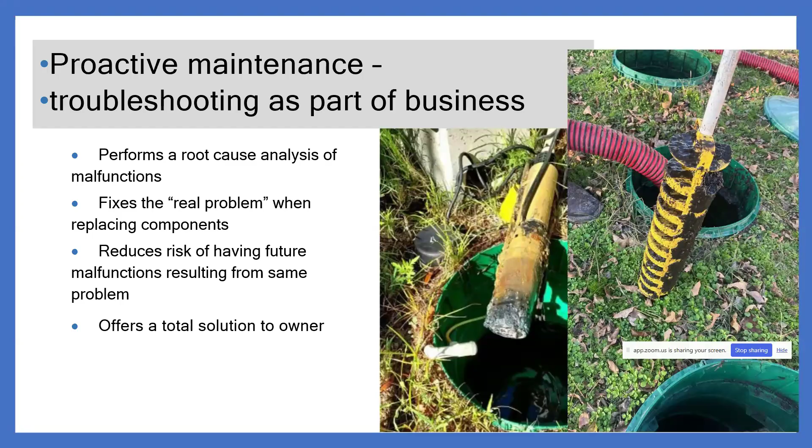But basically, looking at everything from a bigger view, if we zoom out a little bit, we can start to see that a lot of these problems build on each other. What do we need to do to make sure we're doing everything we can, especially with an aging system? What needs to be done so we can maximize the system and continue to have it running well into the future, as opposed to reacting and having to put in a new system, which will cost a significant amount of money? Or we can do some small maintenance changes to make sure we can continue to use it as functionally as possible.

So, proactive maintenance troubleshooting examples. Pump screens plugged result in excessive pump wear and decreased life expectancy. Simply making sure that pump screen is cleaned and in place will help extend the life of your pump. We are not going to do excessive pumping, with that pump turning on and off on a regular basis. It's just pumping what needs to be done, as opposed to excessive pumping to get it through the screen.

Hydraulic overload washes solids through the system due to leaking lids and risers. Again, making sure that if there are any leaks, any lids and risers, that those are sealed properly. It's a simple fix that extends the life of your pump and overall system. We want to seal risers, replace lids, and offer an effluent screen to assist in retaining solids in the septic tank. We don't want any leaks coming out of here. Ultimately, we want everything sealed within the system until the effluent is ready to go back out into a drainage system. We want to retain it within the system, doing everything we can to keep that in, one, for our own health and safety, and two, to avoid major issues with over-pumping, over-leaking, and overall excess stress on the system.

Filter plugging results in long pump run times. It identifies solids in dosing tanks and issues causing plugged filters. This goes back to the idea that we know we're having an issue with our pump clogging, so we look at our screen and see it's being clogged. We look at what is causing the screen to clog. Is there an issue with the solids? Are we not properly maintaining the solids? Are things being put down there that are not supposed to be going into the wastewater system? Having a conversation with the homeowner helps educate them on what needs to go into their system and how to best use it to avoid this overall problem. So we've identified that we're having an issue with the screen being clogged, but now we're looking at what is actually causing those clogs. If we can identify that, we can help prevent any plugs or anything happening moving forward.

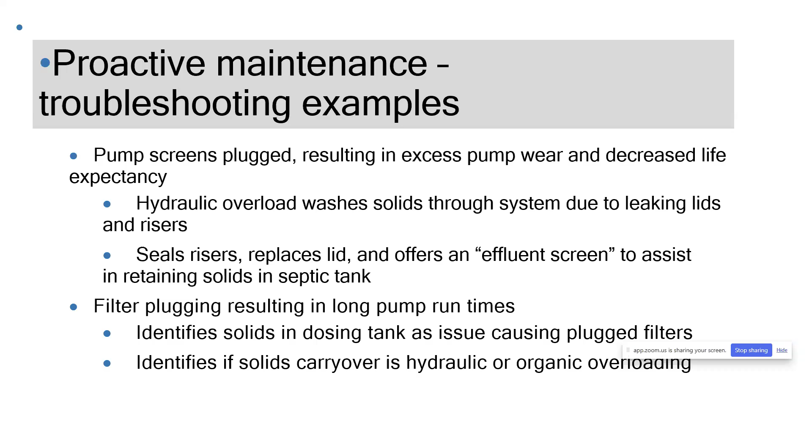We also want to identify if solids carryover is due to hydraulic or organic overloading. So again, looking at where those solids are coming from. What are they? What are we doing to cause the overload, if anything, and what is happening with them?

Proactive maintenance means recording operational data. This is something that's more important than ever, especially with the ease with which it's becoming available, making sure we're collecting that data and understanding it. For systems operational data, we want to look at air pressure, pump runtime, and pump dose.

Looking at pump runtime, is it running an unusual amount, or an average amount? If it's running very high, what needs to be done to figure out why? Is it a leak? Is it a clogged screen? Is it a simple fix, or is it something much larger? And what can be done?

Tracking the data over time, are data values changing, increasing or decreasing operational values? If we're seeing an increase or decrease in pump time, why is that? Why is that pump not running as much? Is that the cause of an overall problem? Is it just a decrease in use, or is the pump malfunctioning and not maintaining itself properly?

We want to evaluate changes and deviations. If there are deviations and they're typical, that's great. But if those start to change, has something within the system changed, or individuals' routines? If so, what do we need to do to figure out what's happening, and how do we adjust our routines to make sure everything is running properly?

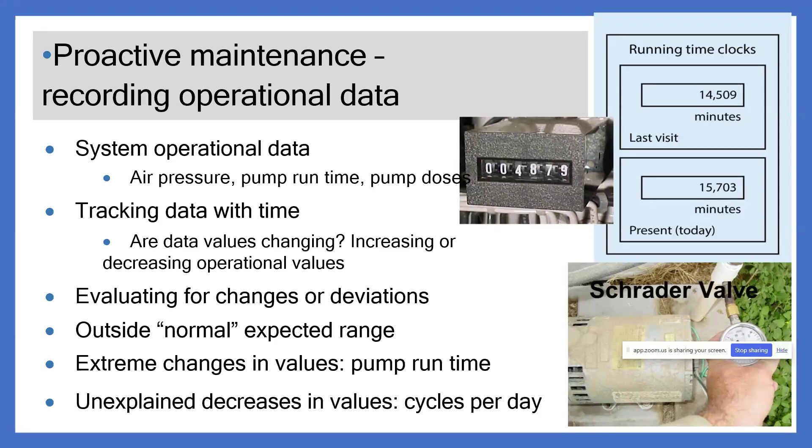Going back to what I was saying, a lot of times these malfunctions don't happen simply or easily, and it's not a one-off of something breaking. It's an overall condition reflecting a much larger maintenance issue.

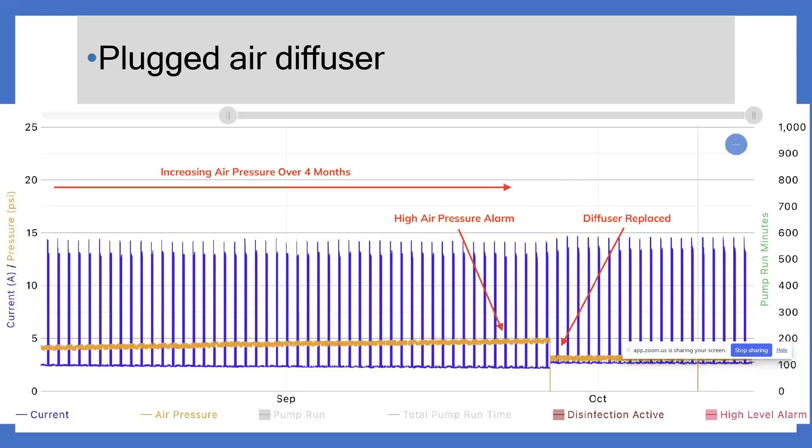Looking at telematics, we combine telecommunication with recorded system data stored by a receiving entity associated with the control system. We track system component operating parameters, looking at pressure, electrical runtime, and dose frequency. We want to record the operational data, and alarm conditions are communicated to specified individual owners or the service provider, letting them know why the alarm went off, what happened for it to go off, and what the ongoing issue might be.

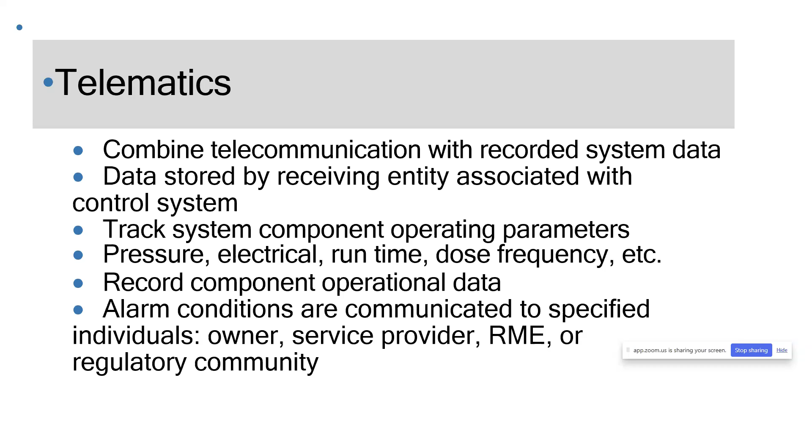For process monitoring with telematics, we combine telecommunication with recording of system data, so we have that system data paired with the telecommunication providing it. We make sure the data is stored and received by someone, either the homeowner or the operators of the sewer system. We track the system component operation parameters to make sure everything is running at maximum capacity, keeping pressure, electrical runtime, and dose frequency consistent. The telematics helps provide that information.

We want to record component operation data for evaluation, which tells us if we're having a problem or heading toward critical failure. We also want alarm conditions communicated to individuals who would be interested in that information.

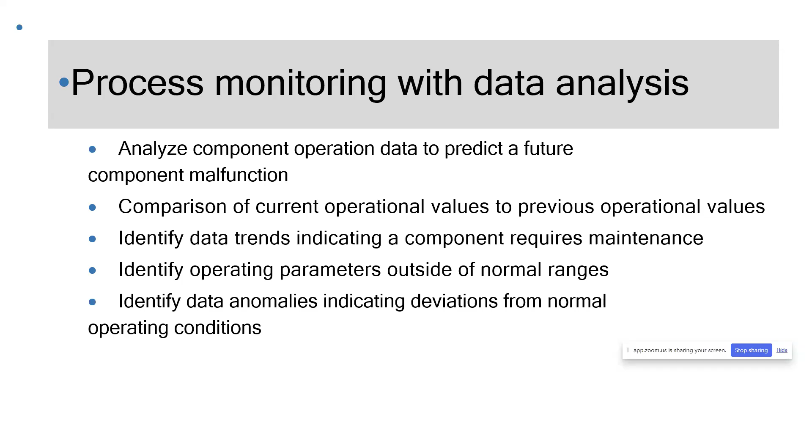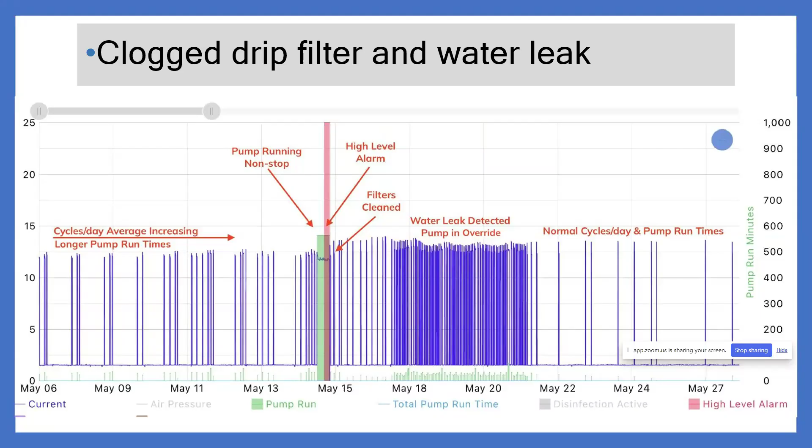We can do comparisons with these, identify trends to see if we're having a problem or coming near critical failure. We can also look at parameters outside the normal range and any anomalies, and figure out what has happened and if we need to adjust, if those are becoming part of a normal routine. This shows how all the data speaks together, letting you know where we are and what we're building, and the data will show you that we're getting closer to a problem.

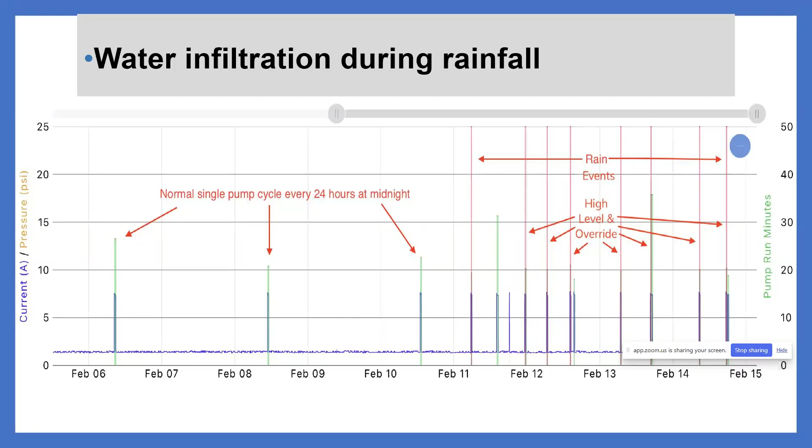Looking at remote continuous process monitoring, how do we monitor those processes if we're not there? We want to make sure we have access and continuously analyze system operation data, even if we're remote, or making sure that we're looking at it.

Early warning systems regarding component malfunction, we want to make sure we have those. That data will help show us if we're getting close to malfunction or failure, so we can repair mechanical components before catastrophic system malfunction, and replace components before degradation of effluent quality.

This can also help reduce the risk of public health issues when implementing water reuse systems. These tools help us understand that and make sure we're doing everything we possibly can to avoid any public health emergencies.

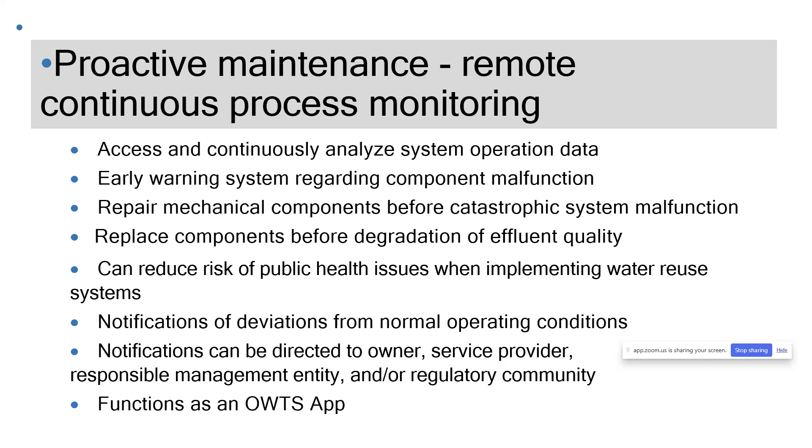Going back to the philosophy of it, we want to make sure that if we do have any alarms, or provide any service providers, the owner expects troubleshooting of the system to identify the cause of malfunction, and that the use of service providers are part of the management team for proper function.

I would also say just the overall cost of what it is now to maintain a wastewater treatment plant is driving this idea that we need to protect what we have, and that we need to do everything we can to make sure everything's running efficiently and at maximum value.

System operation, maintenance, and monitoring requirements—are we doing everything we can to monitor them? As we talked about, advancements in technology are making this easier and more important than ever. So, in summary of the evolution of wastewater management goals.